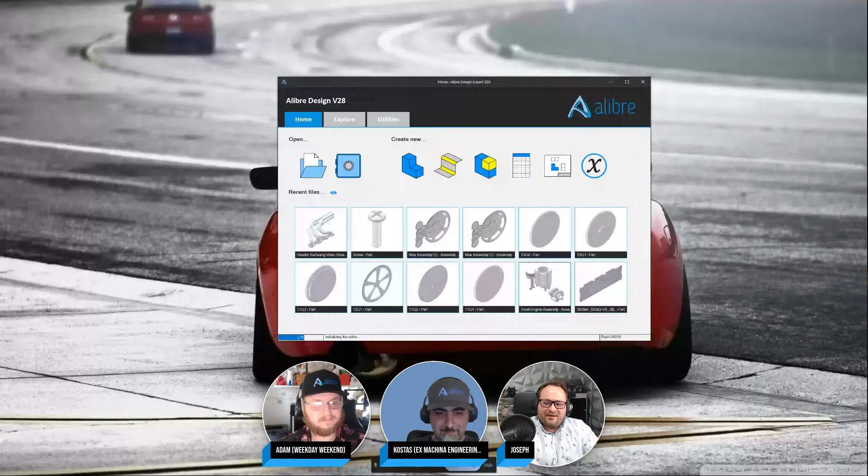So I'll pull up a model of a simple engine. With all my streaming on my machine, it's running a bit slower for the first startup here.

Well, anybody heard any good jokes lately? The one I told in the last stream wasn't quite as funny as I'd hoped. I don't know if it's family friendly, but I can give you a machinist joke: a machinist walks by a hole and he says, 'I tap that.'

I have jokes, but that's fine. The ones I have are not... yeah, inappropriate. So they're not borderline brand-appropriate, we'll say.

Well, while this loads here, I think I want to ask the chat. I saw Sweden, which is an interesting spot. Anyone else from anywhere cool? I'm here from Crete, Greece. So there you go. I take that for granted. As well, you should—Crete is awesome.

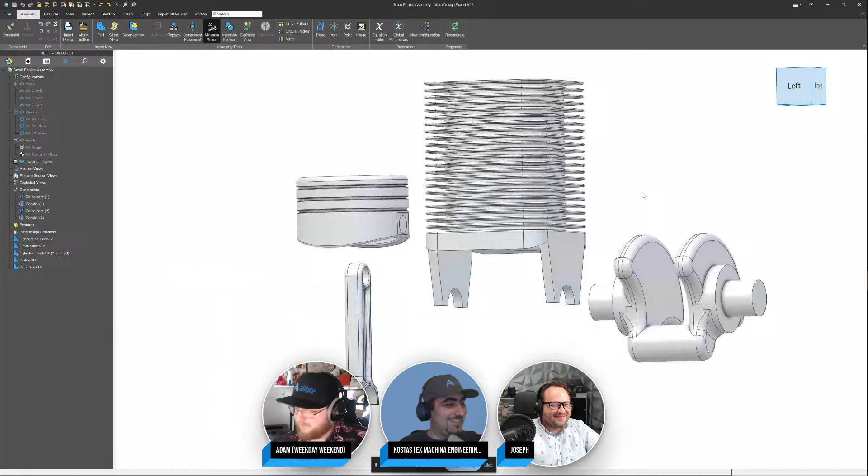Okay, I finally got this up here. So enough stalling on my end, right? If I start building constraints on this—and of course I just go click the wrong edge. So if I start adding some constraints where I click some simple things and I go to position something, there we go.

Let's pretend that when I move this crankshaft in place, I've got some conflicting surfaces. One thing I can do is when I select a surface, and if this is blocking me from selecting this surface—I know it's not, but we're pretending it is—I can right click and hide, and that stays selected so I can still apply that constraint. Then when I'm done, I can simply unhide and get that constraint. So that's kind of my go-to way of getting around when something's in the way. Hopefully that's helpful, let me know in the chat. I don't know if you guys have any other approaches as well.

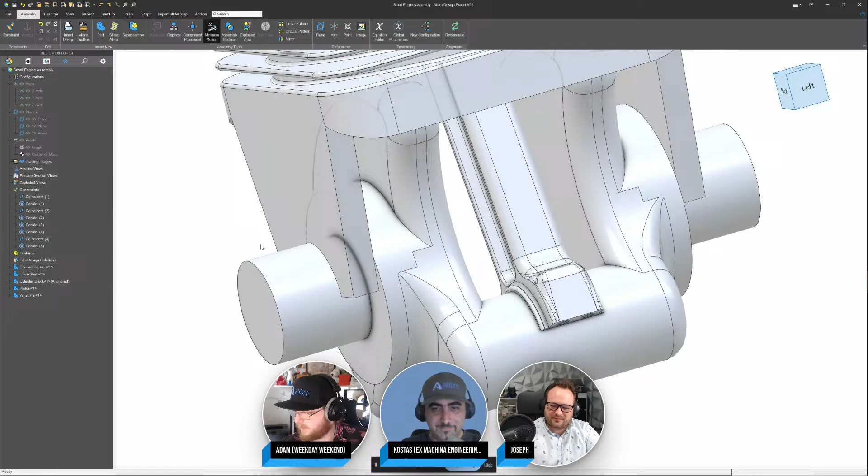No, I think that might cover it. Let us know if that helps you, if that answers your question. Yeah, because this is such a common, ubiquitous thing, right? Sometimes things just get in the way of other things in an assembly.

Can I also say the trick I use to select behind? Just change the view to shaded with hidden edges. That also works in assemblies, but if it's very complicated, it makes the assembly a bit hard to see. But if you've got an assembly with a few large parts and you just want to select an edge for a fillet or whatever, you can change the view to shaded and all edges, that's the terminology. You can even use that to select through in assemblies. That's a cool trick.

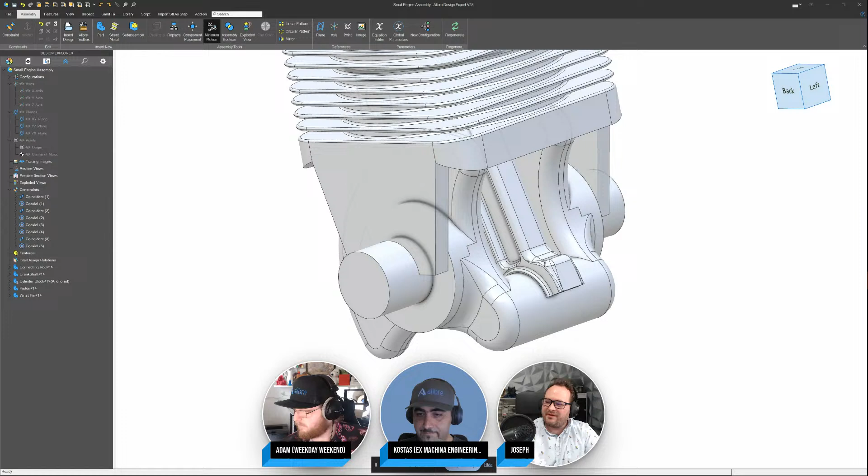That's awesome. I just noticed we've got Michael Berglund, 25 years with Alibre. Yep, that is amazing. Really cool to have a partner with us on here. Maybe you can help us answer some questions too. Thanks for joining, Michael.

Let's see, we got Switzerland, Minnesota, North Carolina. Sweet. All right, any other questions or things that we can address?

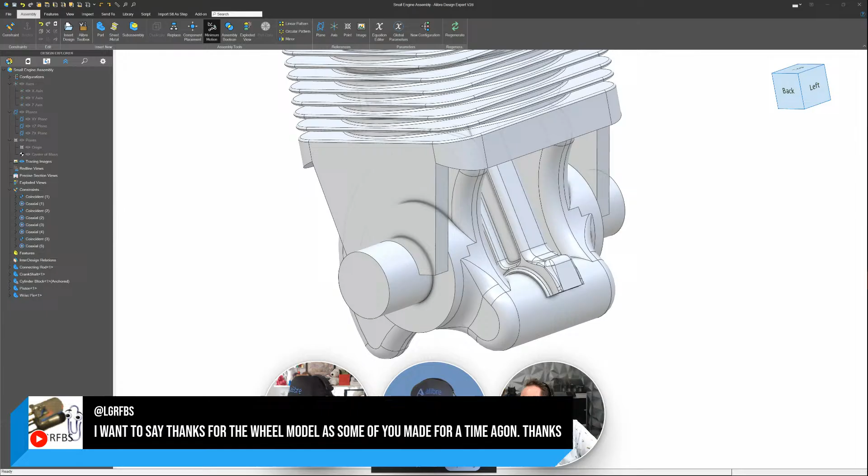Yes, if I can just hijack this. So that's a very interesting question. I'd love to answer that if you would allow me. The question is, what's the most efficient way to create a rectangle with equidistant side edges from a center point in a sketch?

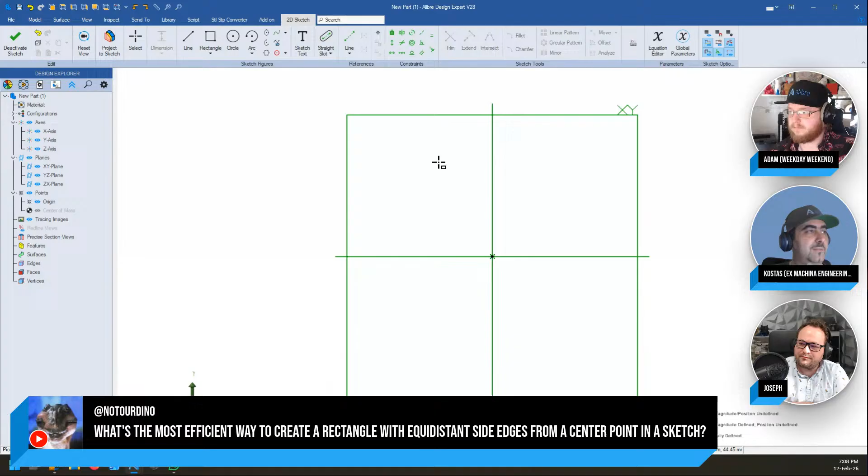Well, first of all, if you've got a sketch, you can definitely use the center rectangle, which will, by definition, do what you want. If the corners are equidistant and it's a rectangle, the sides are also equidistant. But there's another way, and it's a great little tip.

It's to use the midline constraint, that one up there. Instead of using it to define a point as being the midpoint of a line or an edge, you can actually use it with 3 points.

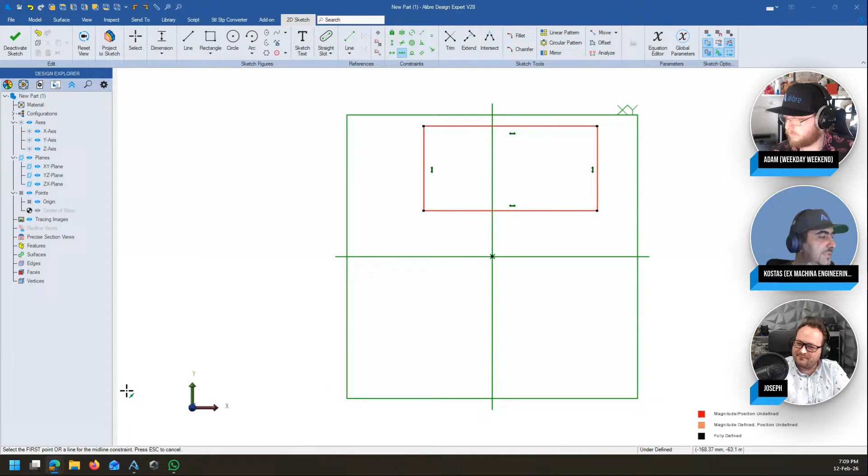The way it works is the first two you select, you can see a little prompt down here. Guys, when you're working, always take a look at the prompt on the bottom left corner. There's some great useful information there, whether you're dimensioning or using any tools in Alibre. It says select the first point or a line. If I select 2 points, now I've defined a linear segment.

Then if I click on a third point, Alibre internally calculates the perpendicular bisector to that linear segment and makes sure that the point I selected is on there. So now I can move these points and they stay symmetrical to that point.

Now, if I also do that for these side points... sorry, I hadn't selected it. Okay, let's go again. What I have now is the center rectangle, with sides that are equidistant from that middle point.

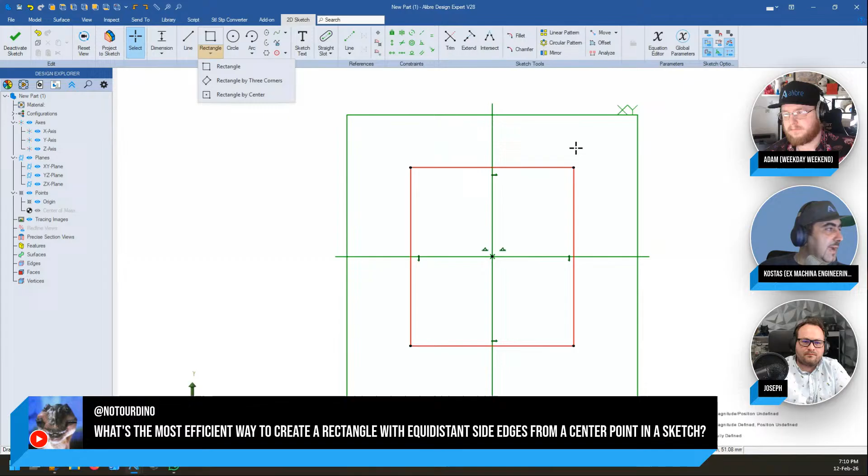So Alibre Atom, for example, which is the budget option of Alibre, less than $300, does not have rectangle by center, but that's how you recreate it in Alibre Atom. You do a normal rectangle, then apply the midpoint constraint, and again the midpoint constraint. There you go, center rectangle.

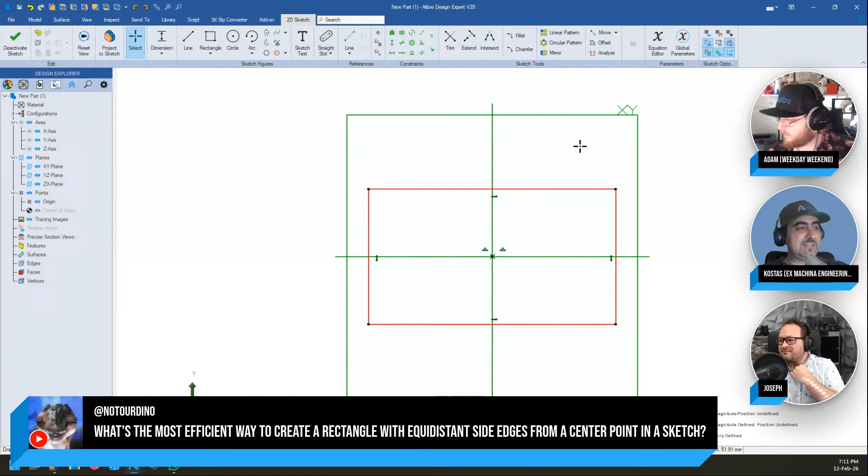I hope that helped, that's a really nice trick. That is a good one. Symmetric works, but I'm really liking the midpoint approach. It's got more potential because it depends on 2 points, so it doesn't even need to be symmetric with an existing line. It's just a single point in the middle of 2 other points. It's more versatile, is what it is.

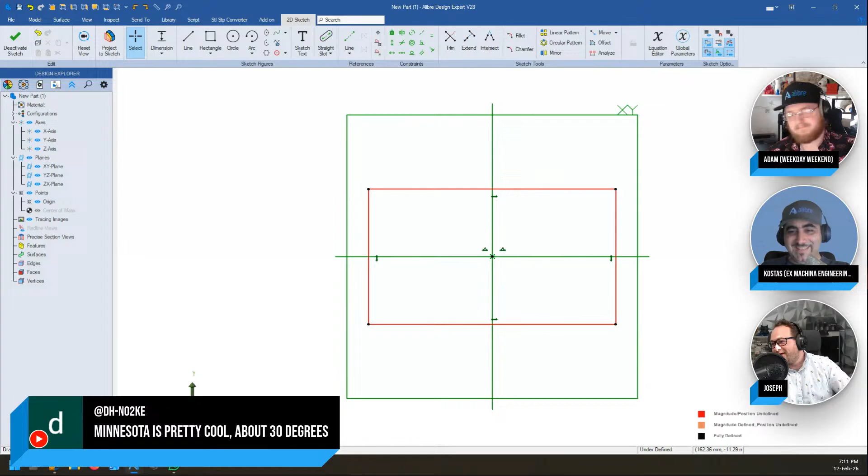I've got someone here from Minnesota. I have to say, I've got family in Minnesota. They have a house in Minnesota and another house in Florida. They like extreme temperature changes. When my cousin was very young and they were moving to Minneapolis, he said, well, we're moving to a place with very small things. They have mini apples and mini sodas. So I just had to share that. Is that, by the way, the same machinist we were talking about earlier? No, okay, never mind.

I like this one. When should you use anchor part and when should you not use it? Do you want to take that, Joseph, Adam, or should I? You can grab it, however Joseph can. Yeah, we're on your screen. Let's do it.

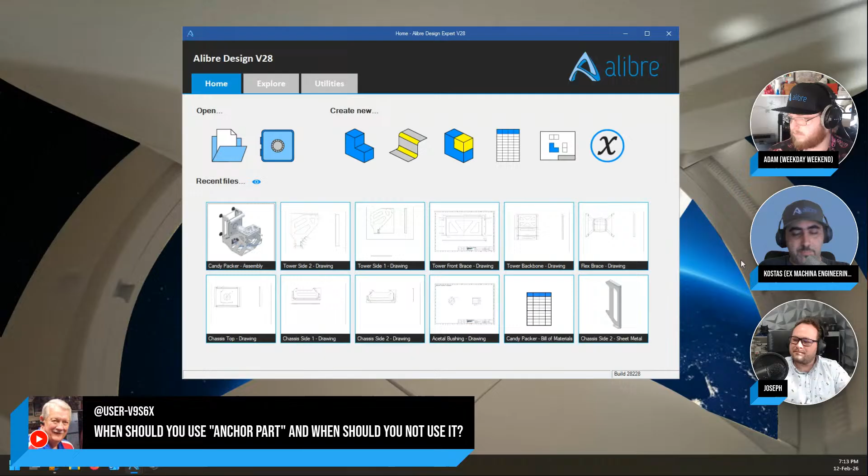Okay, so when should you use anchor part and when should you not use it. The idea is this. I've got a token assembly here. Again, don't tell anybody you saw this, right? This is between me and you guys, live stream exclusive. So don't tell anybody you saw this assembly. But the idea is that when you have a part that you know is going to be stationary, and it's one of the initial parts of your assembly, and it's a very basic part, then it's a good idea, and generally speaking, you can use anchor part on it.

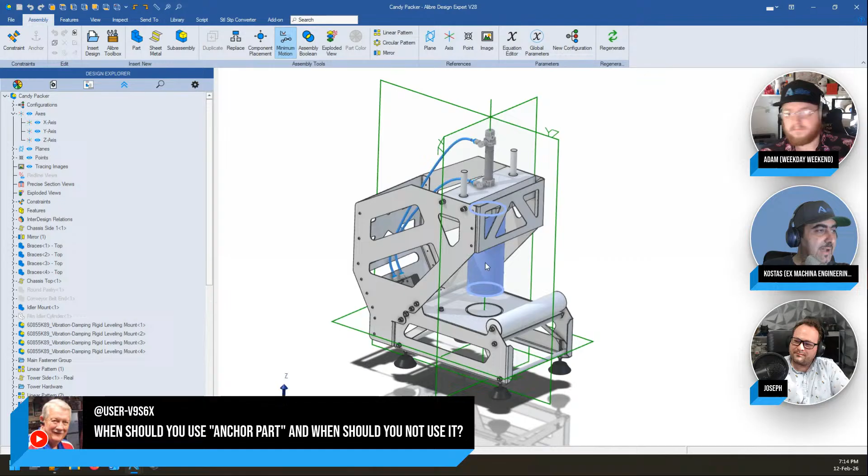On the other hand, you should know that anchor part, and that's basically what I want to bring your attention to, is evaluated alongside the assembly constraints. So if you've got an assembly that has some motion in it, and you need to check that motion and account for it, maybe even get some measurements off of it, it does pay to constrain your parts, because that will create fewer constraint collisions, restrictions, and errors down the line.

So my working advice, what I've found working with Alibre, is if it's one of your very first parts and you're completely sure that it's never going to move and never going to have any kinematic properties, yeah, you should use anchor part on it. But if you can take the time and constrain it properly, it's slightly better. So I hope that helps. And if you guys have some more input, please go ahead.

Only thing I can think of is that depending on what you're doing, it might even just be better to take the extra 2 seconds and constrain it by aligning all the same planes. It might also be just a little bit more robust. Yep, certainly. If you have to rotate your part, then you can change which planes are aligned with which, so you can get a nice rotation that way.

If you don't mind, I'll jump to my screen real quick. Just on that note, we'll go to Insert Design, and I'm just going to insert a random part here. Now, if I hover over my origin, you can see that little red dot symbol there. That means that all the planes are going to be aligned, and that is a quick and easy way to make sure that you have the same geometry as when you modeled the part.

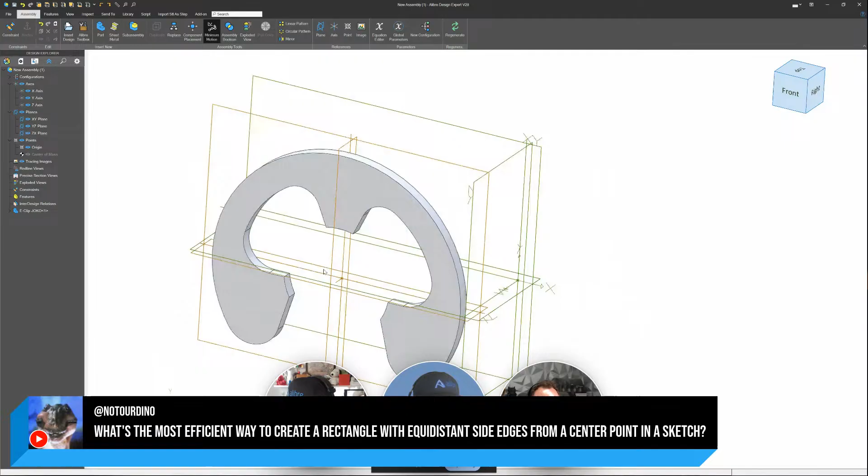So if I right click and show reference geometry, these orange planes are the planes that I used to model the part, and we're lined right up on that origin, just the same way the part was modeled. So if you need to do mirrors in the future off of your initial part, that's a great way to make sure your planes are aligned around the origin to do mirrors properly. And then if we just anchor the part, we know it's anchored around those planes. But as we said, it's a lot more preferable to align it other ways, because it opens the door to simply change things if you need to. Hopefully that was a helpful addition.

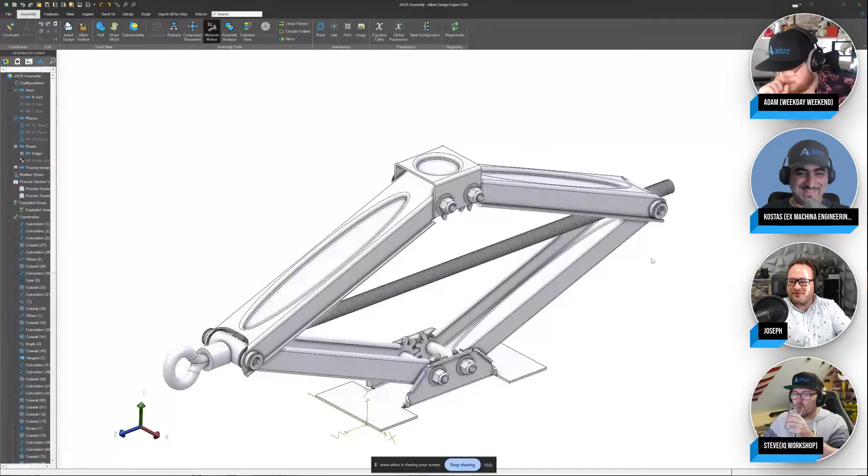This is a pretty interesting one. I designed a turnbuckle and constrained it in an assembly. It will turn, but it won't thread. What am I doing wrong? And the answer, I think, is possibly nothing. I can take this on my screen here. So here I've got a lifting jack, and as I twist, it lowers and raises, and that is due to a mate that we would have, like a mechanical mate or a screw mate. So it twists as I move things. This is available in Expert, I'm pretty sure, not in Professional, so if you don't see that mate, that could be the issue.

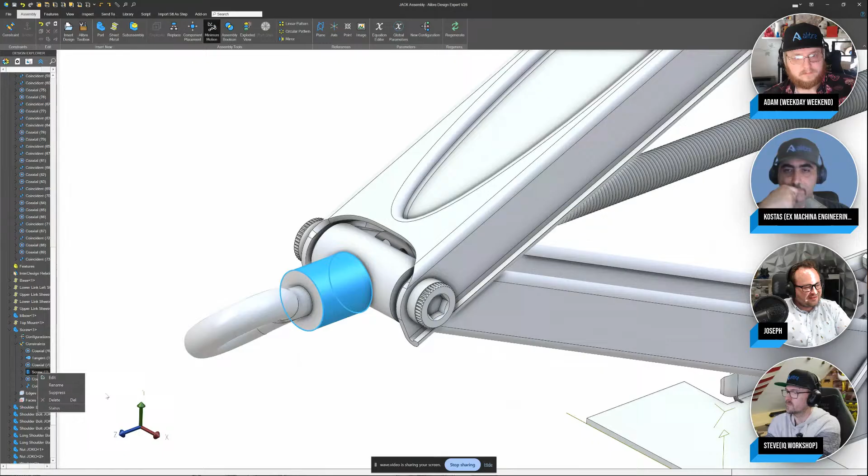Let's see if I can hurry and replicate this mate here. I'll show in Explorer and go to my constraints. So here's a screw mate that I'll suppress. And by the way, if you ever need things to thread properly, if you're very particular, you can suppress the mate, and then adjust it to where it's going to fit properly, the right amount of turn and everything. Then you can unsuppress it and it'll be right on track.

I do that with gears a lot. If my gear teeth aren't aligned right, doesn't make a bit of difference, but it's much nicer to look at. So I would leave that sort of stuff in so that the gears didn't mesh properly, just to trigger people on purpose. There's some fun with that too.

I do that as well, Joseph. And I thought, Kostas, I think you're muted. No, I can hear Kostas. Oh, I can't hear. Well, I am. Really, no, I can't hear Kostas either. Well, let's make sure you have director's voice on here. Anyway, so I just wanted to say, if you can hear me or not, that I also do that. I don't know, you in the chat, can you folks hear Kostas? Let us know, can anybody hear me? Am I a voice? You might have to refresh your browser. I've had that happen before. Let me do that right now. Let me refresh mine right quick.

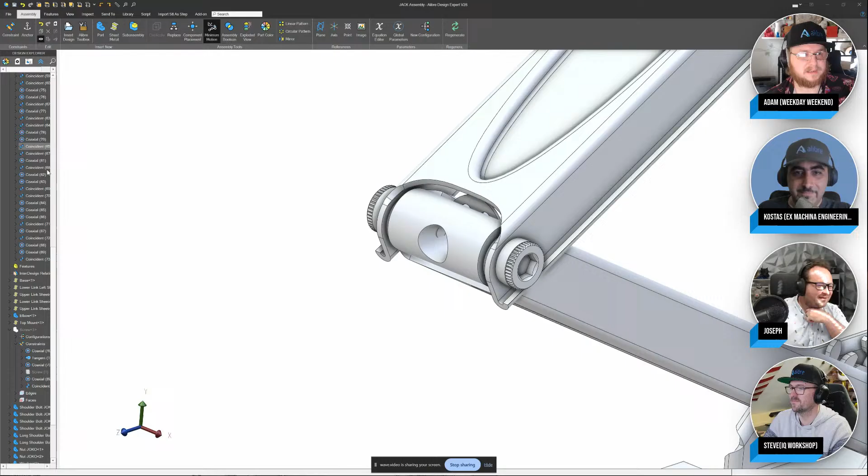There we go, go back to director's voice here. And then there was 2. There was 3. Can you hear me now, guys? Yeah, I could hear you all along. Okay, and now we've got 5 bubbles. Greece is not that far from that way, I might have been able to hear you if I'd done that. That's the thing, right? You know, England can hear me because it's closer. So maybe I should start yelling, what do you think? Maybe a big megaphone. Definitely do it. Yeah, stranger things have happened.

Audio. So to apply a screw mate, we'll go to add a constraint. I click on the mechanical tab right there, which is available in some versions and not others. And we choose the 2 geometries, and I actually think I need to choose an edge here. I have not done a screw mate in so long. So this is good because we're all getting refreshers too. Yeah, I need a refresher here because my screw's grayed out.

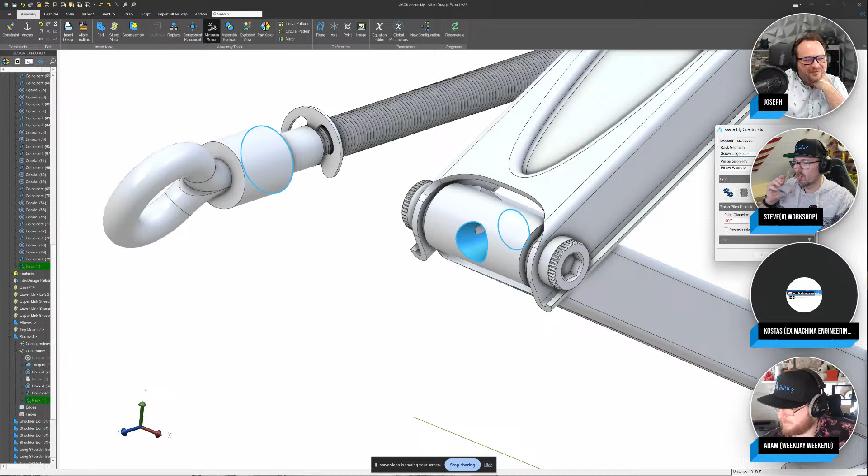All right, what am I doing? I'm glad I'm not the only one that has to refer back to one of my own videos to figure out how I did something. Oh my gosh, yes, I do that with my own videos all the time.

There is a fantastic Basics of Assemblies video on the official Alibre channel, by the way. Apparently watch my videos, not me live - that's way better. Well, I think we can safely say that Joseph has forgotten more things about Alibre than we will ever learn, and it's official. So I guess so, there you go.

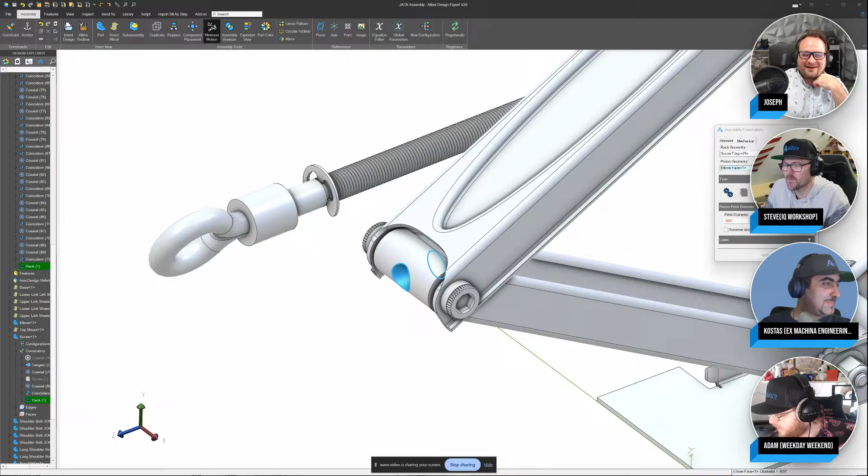You've done a lot with importing and exporting. This guy's asking about SVG or DXF importing - having trouble of course with exporting a file that imports easily.

So yeah, sure, let me find the file that I used for my latest video. It says exporting from Illustrator, but if there's a better program or format that easily imports, you'd appreciate it. Okay, let me see. So I haven't been using Illustrator.

I've never used Illustrator. What I use is Inkscape, right? It's a sort of open source alternative for it. It also works in Linux. It's amazingly powerful - the more I use it, the more stuff I find out about it. It's a great piece of software, right? And I've got it up on screen now.

And so in my last video, I did my homework, which you guys have yet to grade, actually, right? You should grade it, I'm still waiting for the grade report on my homework. So for that homework, I needed to get some female hair on a dummy, right? Don't ask why, go and watch the previous live stream, too long a story. Steve's laughing - don't laugh, man, this is serious stuff. It's homework, homework's serious stuff. It can be fun. Yeah, it can be fun, sure.

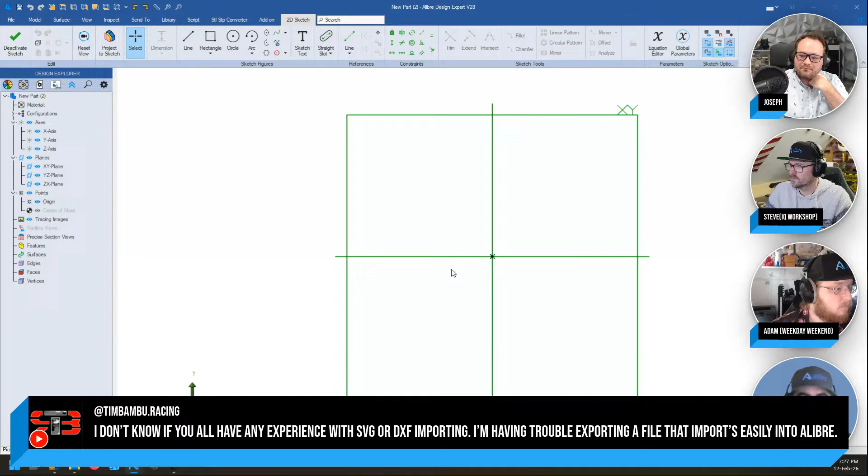And I get this menu. Let's click OK for now. It takes a while because it's a bit of a file - that particular one had too many corners, but it will eventually come in, and it will come in as a sketch. And it's worth noting that... oh come on, where is it?

Highlight it in your view. There you go. No, it's sketch is turned off, and I accidentally closed the sketch.

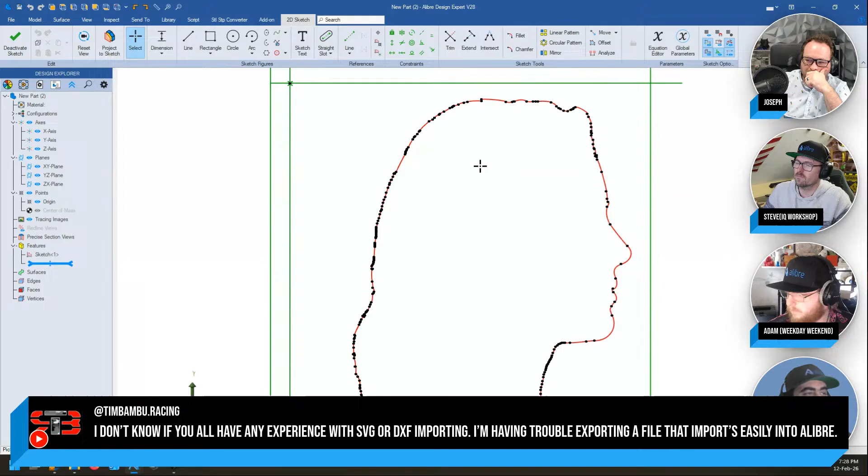What you should know here is it comes in as a completely undimensioned and unconstrained sketch. So this is not fully defined in any way. But if you did the work correctly, and there's a single line in there with nothing overlapping, and you don't have double geometry and all that, you should be able to extrude it straight off of the sketch.

That is, I think it's SVG. Go on, Kostas, keep going.

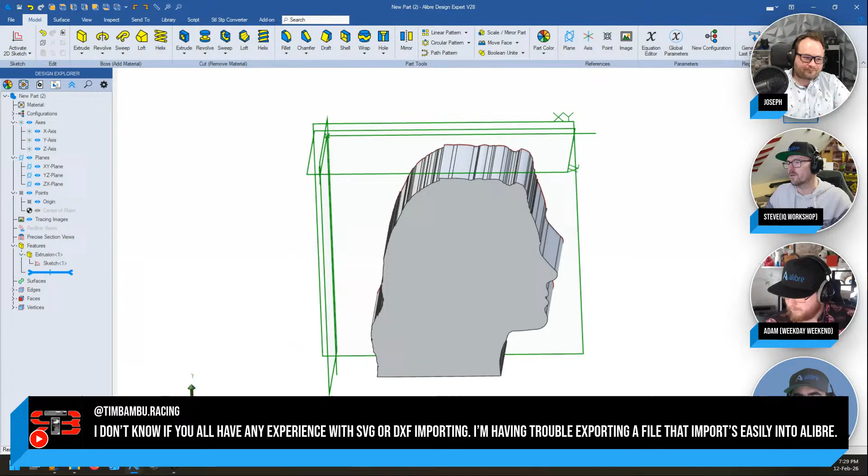I just want to say that this is the workflow to get an SVG into 3D. I was just going to compliment what you were saying in that various different applications deal with vector files. Even though an SVG has a particular standard, a DXF has a particular standard, every application, whether it's Adobe, Corel, or Inkscape, handles vectors and points very differently. And Inkscape, as you pointed out, I have found to be very reliable.

As an intermediary sort of application, if you're having trouble with a file, it'll load it up, and if you resave it as DXF or SVG, you very often find the resulting format that Inkscape outputs is more universally accepted.

That's true. I'm using a laser cutter with a very old piece of software, I think it's LaserCut 3.3, and the software looks like it's out of 1995. But if I try to export anything from Illustrator or similar, it hardly ever comes into that software with any degree of accuracy, and there are spurious lines and all sorts of noise.

I just load that into Inkscape, save it as a very early DXF format, like pre-2000, pre-R12 I think it is, and it just loads up into the software fine. So Inkscape is really good as a translating application in the middle. It has actually gotten me out of a tight spot on more than one occasion.

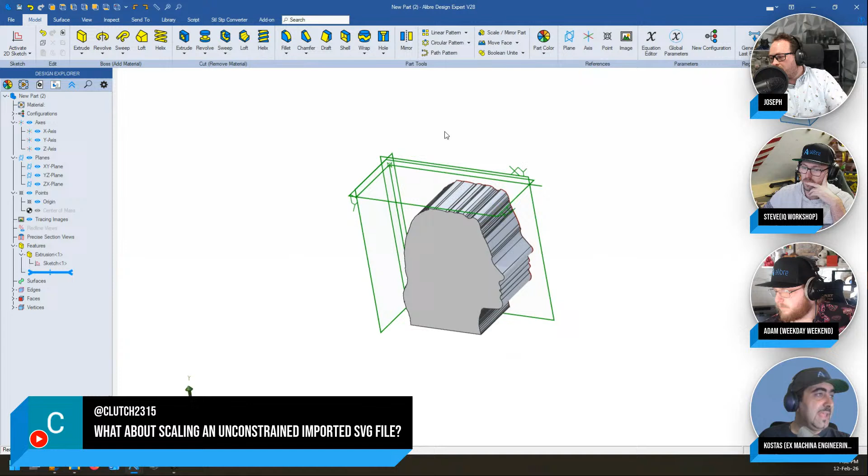What you can and should do with DXFs, and actually this particular file—if you watch my latest video, I do that, I've got that in fast forward, but you can see the workflow—this is too small, I couldn't use this because this was too small. So what you do is you get a 3D shape out of it, and then you scale that, and you do that through here, this is the menu.

So let's do a, I don't know, scale factor 3, for example. Okay, uniform scale. Now...

If you don't need that 3D file, you just want a sketch to do something else, and you definitely don't want this 3D shape in there, you can go into Surface, which is available, I think, only in Professional and Expert—if I'm wrong, correct me there.

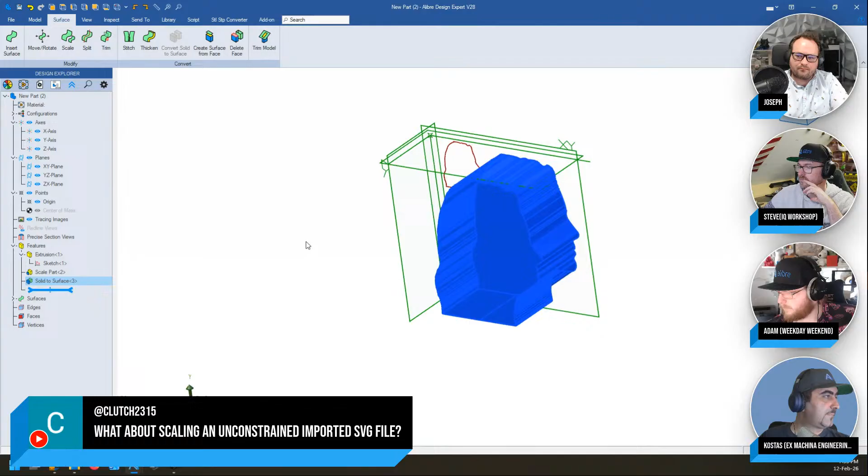And you can convert solid to surface, and then you can delete this surface... no wait, oh man, I tried to be speedy and it failed. Maybe delete all of the faces? There's quite a few of them in there. Delete face, maybe that'll work. Yeah, that'll take 15 minutes. Oh come on, go already.

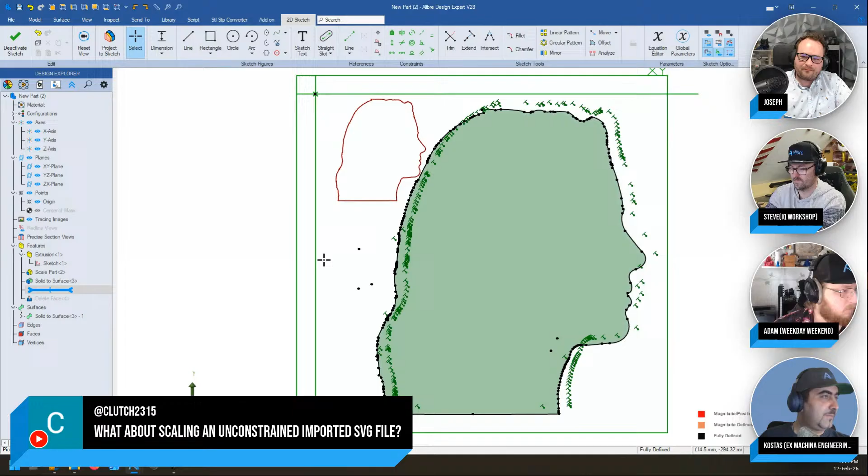So now, and this is parametric, I can go back because I forgot to do what I wanted to do. So now I can start a sketch, and I can project the scaled surface—and that is going to take a while because there are thousands upon thousands of little points in that one. There you go. I exit out of the sketch, and now I will go and delete face.

So now I've got the scaled sketch, and I don't have any other 3D geometry messing up my design anywhere else. But that's the way you should do it. You should not be trying to scale the SVG or the sketch right off the bat. If you've got a super simple import, which probably doesn't apply to anything, but if it's a circle or a square, you could probably go into the sketch and do offset entities to save some time. But you'll get distortion as your shape grows even moderately complex. So that's a very limited scale where that would work, but this is a great solution.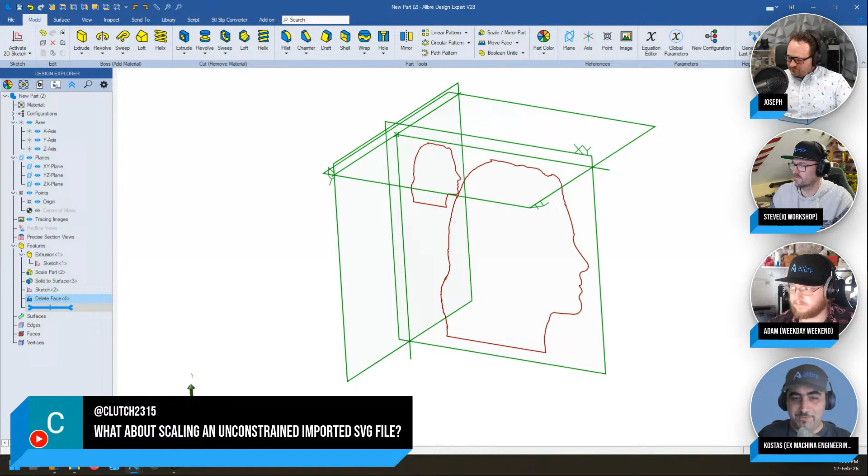Let's see, I've got one possibly for... there you go, Adam to the rescue. I've got a really quick one for Joseph here: where can I see more of that Steam loco design that shows up in the intro?

Oh, that's a good question. That was part of our Alibre design contest, and I don't know if we have the rights to distribute that, but it's a really cool one. You can probably see at least some more information about it on the Alibre website though. Yeah, and you can also find a ton of pictures of that model and detail in the gallery section of the forum. So, and it's got some great renders, some great pictures. It's an amazing model, by the way.

I'm not sure who made it. I think I know, but I'm not going to mention it because I don't want to get it wrong. But this thing is designed down to the very nuts and bolts, right? It's an amazing model. And the fact that it's on the forum means that if you wanted to ask questions about it, you very well could, and the guy who made it is very active in the forum.

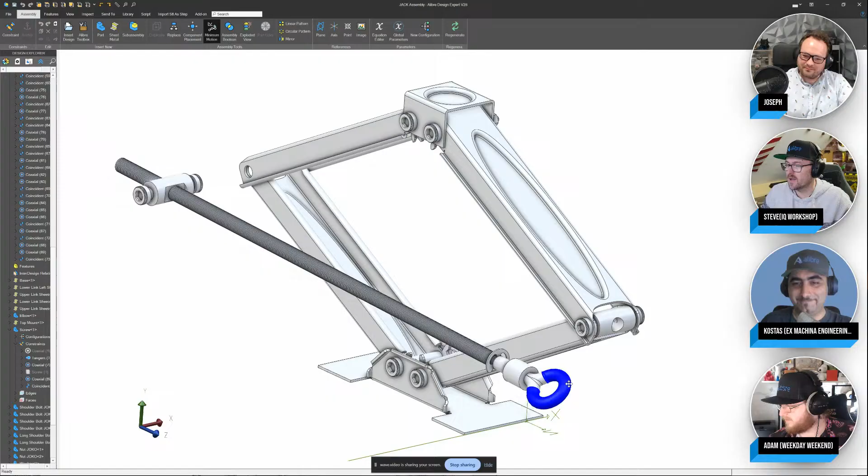So there you go. And I figured this out, guys: the faces that I was clicking were going to be a potential over constraint on the assembly. So that was all that was. So, yep, we click a face, we click another round face, and then our threads are selected and we can establish a pitch. So just a real minor thing.

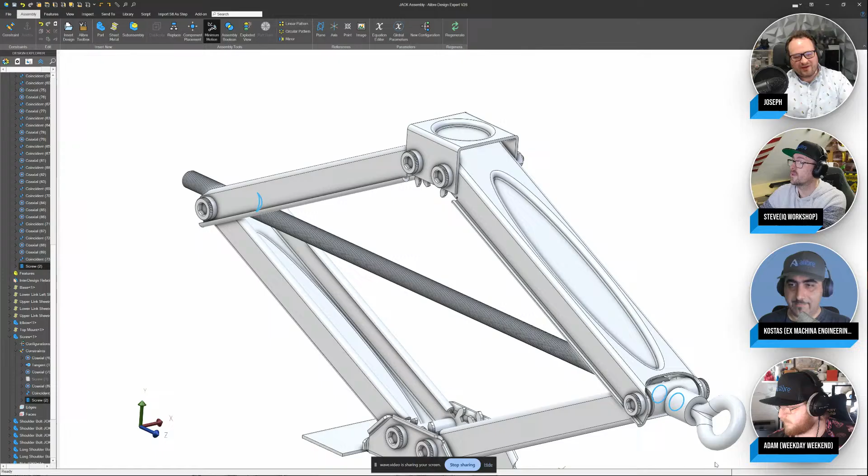And I put a really, really coarse pitch in there so that it would be obvious. I'll go ahead and close my dialog and unsuppress that mate. So now when I turn it, there's a lot of movement because I just made a screw mate with a different pitch. So that's how you would do it for a turnbuckle. Let me know in the comments if that helps, and sorry for the delay on getting to that question.

Adam, yes, can we grab the question at 5:26 for me? It was literally the one before you selected about the loco, the Steam loco design. I'm not sure whether or not that one would get into the forum.

This one: yeah, so if you glued a metal rod into a 3D printed PLA part and later you realized you need to remove it, how are you going to do that? So it all depends upon what adhesive you have used on this part. If you have used CA glue or super glue, one thing you can do is use acetone. Soak it with acetone, and that will dissolve the CA glue and allow you to remove that.

Just be careful using acetone around your 3D prints, depending on the material. It's okay in this case because it's PLA, but if you're printing anything in ABS or anything like that, you need to keep acetone well away from your prints because it will melt it. Also use a well-ventilated area. 100%, acetone is flammable, so you need to keep that in mind. All your hazardous material - read the label, right? This is definitely not safety advice.

A lot of hot glue or super glue can also be removed with isopropyl alcohol as well, depending on what you got on hand. So I just thought it'd be good to cherry pick that one out. I'm not sure if that would be relevant in the forum or not. So, cool, this is a really quick one.

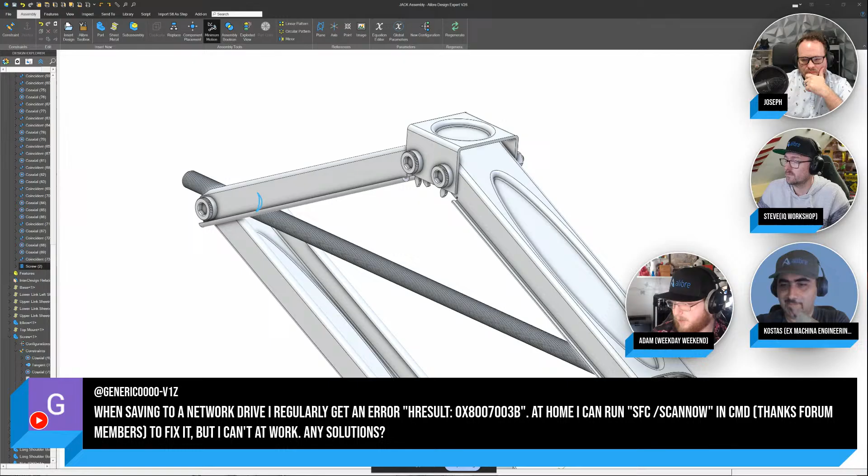You might also talk with your IT guys and ask if they can take a look at your OS, maybe run that for you. Maybe if you tell them your PC's running a little shaky, maybe they'll be willing to run that for you.

Absolutely. I'm going to see if I can get that locomotive on my screen here, just so we could view it at least.

And while you do that, can I just answer this question here by Silvio Z? Can Alibre handle mesh, just show mesh in the background to help for design or what? It doesn't quite work exactly like that. But we have covered STL import quite a bit in previous live streams.

And you can find a ton of resources in the forum. Basically, what you do is you can import the STL. There are applications, and there's a great plugin by Bolsover, David. Bolsover is his forum name, his forum handle. And he's made an absolutely epic add-on, which first converts the STL into a step file and then imports it into Alibre. And then what you have is a solid that is based on that STL. Now, of course, if you have any round surfaces or edges or whatnot, STL will lose a bit of information there. It will interpolate it with straight lines.

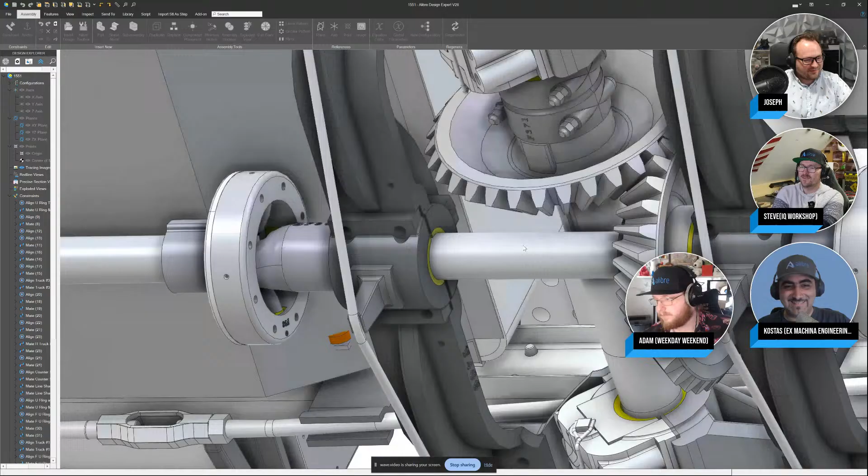There's all my screen rotations catching up to me. Still in process of opening this part. There's so much going on here, which is pretty common in any platform of this scale, but the detail is so amazing here. That's twice in one stream this model has impressed me now.

So yeah, that's a good point. We'll check the showcase and see if we can add this in, because what an interesting part. It's just so realistic, it's amazing. And I cannot begin to imagine the time it took to do all of that. Because it's not like, oh, I'll get the shape right and that's it - they actually designed it. Pretty cool. It's so realistic that it's one of those things where you look at it and think, oh, they made it look easy, but it's so not easy.

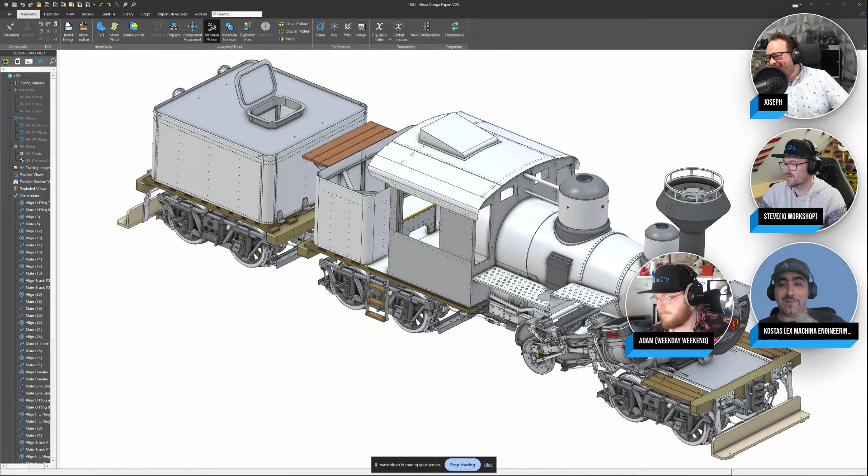But here's a pet peeve of mine with CAD - I know you all want to hear about it. I see someone saying, I'll make this video, I designed a Formula One car in SolidWorks. No, mate, you didn't. A Formula One car is like 85,000 different components. You did not design it in SolidWorks. You just made something with the general shape of it. But let's be honest, you didn't. And this model is the exact opposite of that.

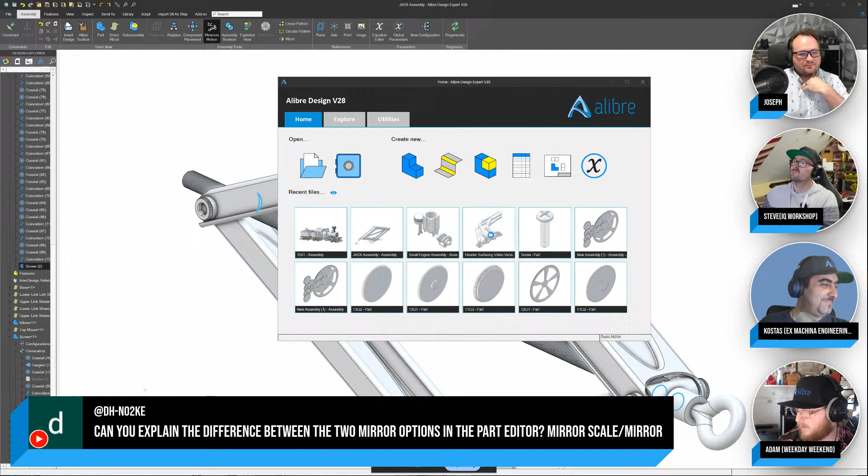There are two different mirror options, one of them being just mirror and the other being a scale mirror, and it's right in the name - the scale mirror is designed to scale. So I think he briefly touched on that, but cool.

I'm still recovering from that big train file, but that's something that might be good to demonstrate too. In the meantime, I've got Relief Maker. What is Relief Maker? This is something we have, but it's not part of Alibre - it's a completely separate product. Someone in the forums, Stepa Libre, who is really, really smart, says that we're killing it with the live streams, but what about Relief Maker? So I wanted to address that here.

Bas reliefs are those things you have, like ancient sculptures, where sometimes they'll have an image that just kind of sticks out of a plane but isn't a full 3D model. When do we use bas reliefs? We'd use it for things like woodworking - a friend of mine I used to work with in medical had a CNC machine and would make artistic bas reliefs like this and sell them, really, he made a lot of money. In woodworking we may want to add a lot of detail and make products with images that stick out of a plane. Another use is coin making - think about all the faces and things on coins, bas reliefs are really important for that. Modeling that in any CAD could be really challenging, but it becomes really simple with dedicated software that makes these kinds of reliefs. Jewelry is another one, if you need to make rings or necklaces. And in general, art and sculptures play a big role too.

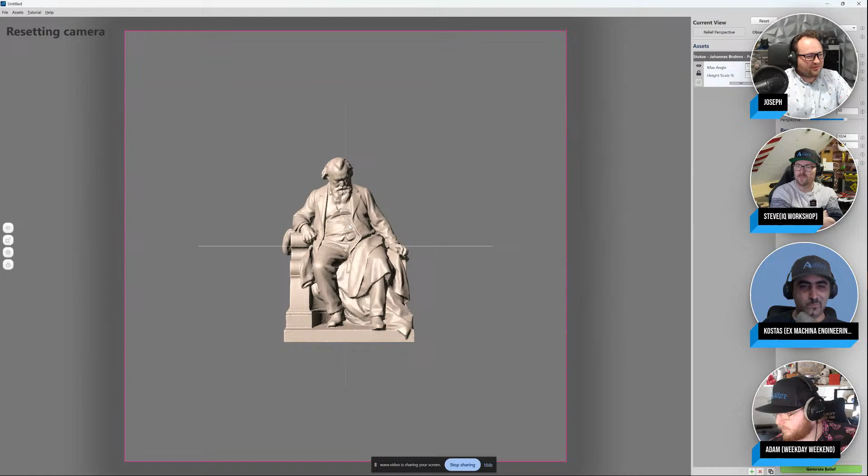So we're going to add an asset from a file, and I think I'm going to go with this Brahms guy. I don't know exactly who he is, but he looks very statue-worthy. So we have this STL or OBJ mesh file, and when I create a bas relief, I simply click on Generate Relief. I've got it at an angle that I like, and it makes a bas relief of this guy, easy as that.

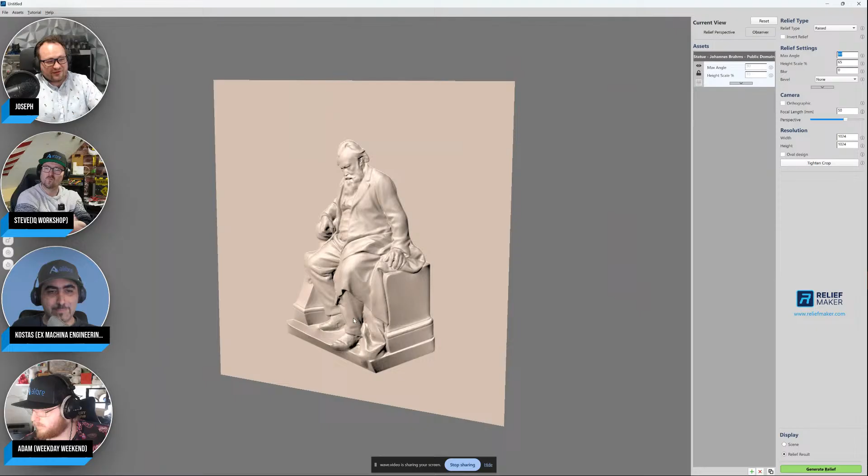Now we have some fine tuning that we can do. We can say, right now our maximum angle between everything, but it's most obvious coming out of this plane, is 80 degrees. So if I were to CNC this, it's pretty much guaranteed to work because there are no overhangs, and I can control the angles between everything, so I can use the tooling that I want and know that it will work.

Likewise with 3D printing, if I change my angle to 45 and I need to print this in the vertical orientation, we can regenerate this relief at 45 degrees, and we can see that there are no overhangs that exceed 45 degrees. We can print this in the vertical with no supports.

So we can fine tune with our different angle options, but we also can scale our height. So if I say something like 10%, we want this to be a lot lower, and we look at this from the side, and I generate my relief, it gets a lot lower. So this is almost like coin territory here.

Let me pull up another example. If I open up a new file and I add a dragon, this dragon has certain details that I care about. Let's say that I care a lot about the scales, and I'd make a 30-degree max angle, and I scale this to something like 10, and I want this to be very flat.

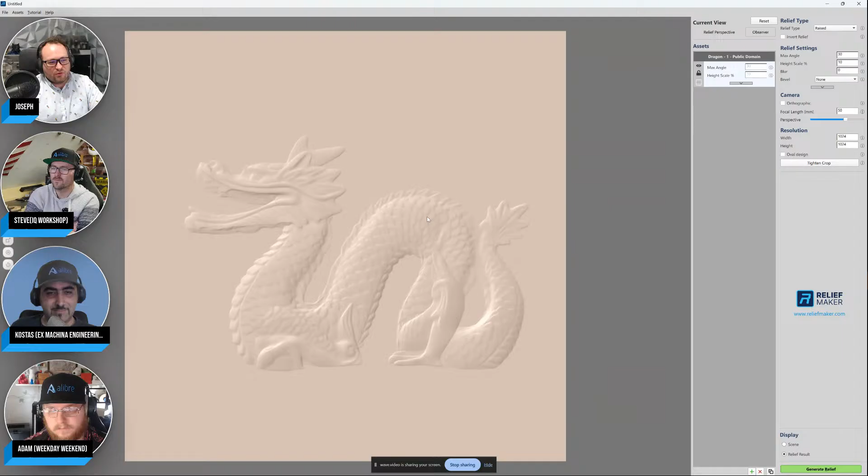And as I generate this relief, well, it's pretty good, but maybe I want more detail with the scales, or I want to emphasize certain things. If I go back to my view, I have a few tricks up my sleeve.

The first one is I can say I want to emphasize contours. When I emphasize contours, you can see that there are some pink lines around my model. This is what my graphics card has found to be sharp contours that will be emphasized. So if I look at this ear right here, and I generate a relief, there it is. We can see that that ear is highlighted with a sharp contour now.

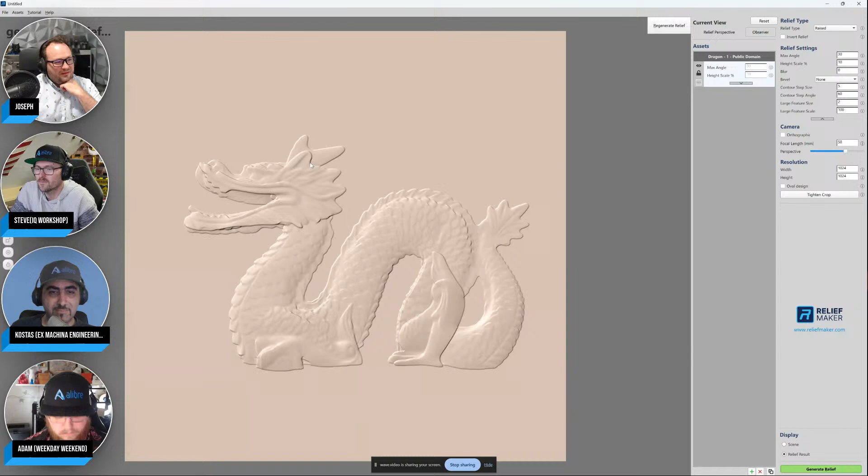You can see a lot of sharper lines, and I can exaggerate that. If I turn this up all the way to 5, you can see just how much we emphasize those angles. So we can customize our relief in that way. We can also change the angle that these contours apply if we would like.

But on to my favorite thing, it's not showing the scales very sharply. Let's say that I do want to have a really small offset like this, but I want the scales to show more. This is a really advanced kind of mind-bending feature, but if I draw a line from one corner here to the corner down there, then I can say, what would be a large feature? I'm going to say anything larger than 2% of the length from corner to corner, and so that would encompass all of the scales as small features, and then the big features like the head, the whole body, big stuff is large.

And so I can change what I specify as being large or small by changing the number in my large feature size. But let's say that my height scale should be something more like 30%, but everything large is going to be scaled at 20%. Well, then our scales are small, and so they'll be emphasized more, right? So when I generate my relief, I can make some custom alterations like this, and my scales show up a little bit more. Can you see that?

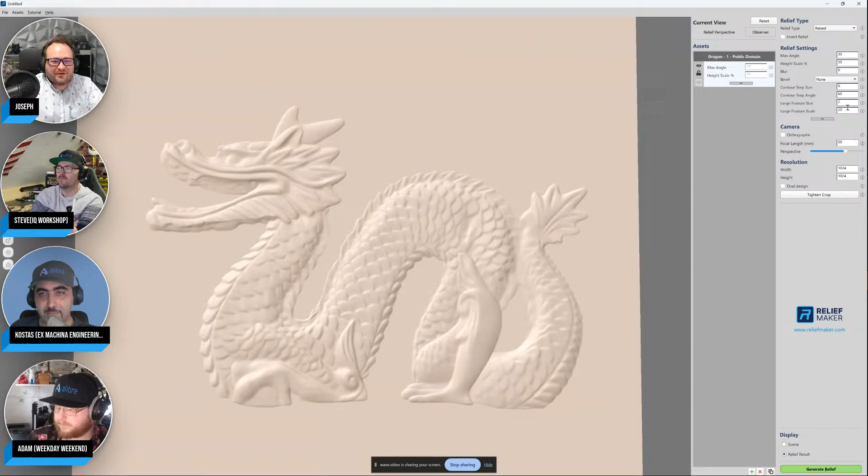Now we can monkey around with a lot of these settings to get some really fine-tuned bas reliefs in ways that you just won't find with any other software. Here, when I go to my height scale, if I give this a 60 and I generate my relief, we can see that the scales and things will show up even more. So I can play with settings like my contours and my small feature versus large feature scales, and things show up a lot more. I'll give this something really crazy just to overemphasize what's going on here.

So we scale this 300% for small things. You can see how much more it shows up. We can add a blur, and it actually makes the solid look blurry. I don't know how they accomplish this, but here comes a blurry dragon. Isn't that wild? Yeah, it's kind of anti-me because I love my sharp images, but it is cool when you want to apply a blur.

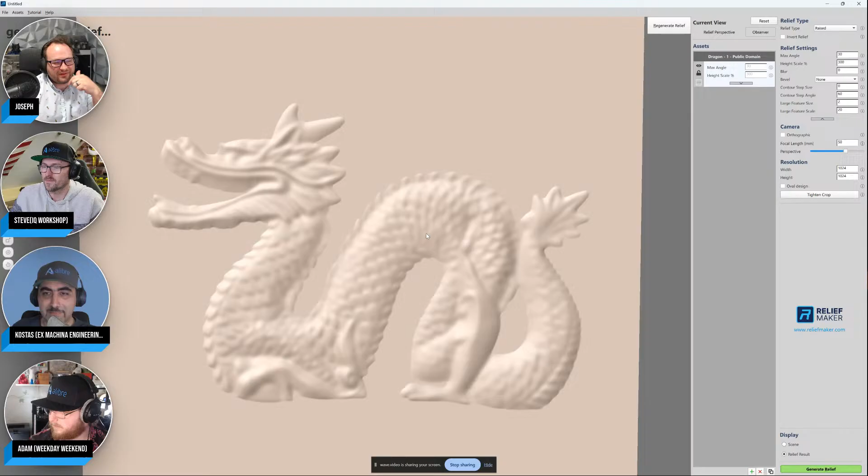We have a bevel effect. So let's make a baseline here - this is without a bevel effect. You can adjust the lighting with the right mouse button, but we can make a bevel where it kind of stands out of the plane. If I put a large bevel on there, we're going to see our dragon come out of the plane a lot more. Just like that, you can tell everything is beveled a little bit more. So lots of custom looks to get from just one single model.

We can also adjust our focal length on the camera. So this is a 21 millimeter focal length that I'm generating now. You can see there's a little bit of a change there because our camera changed focus.

You can change our output resolution. I do like my higher resolution, I'll go 4,000 by 4,000. And then, of course, we can crop it into an oval shape if we prefer that.

So these are things that we can export to a CNC machine, a 3D printer, something like that, and get really professional bas reliefs, whether you're making coins, jewelry, wood decorations, or even Han Solo - he kind of turned into a bas relief. So I think this is a fantastic example of a software that does basically one thing, but does it really, really well.

That's true - it doesn't have so many features that you're like, okay, how the heck do I use this thing. It looks like one of those softwares you can download, install, have a goal in mind, and get there with very little overhead of trying to learn what you're doing.

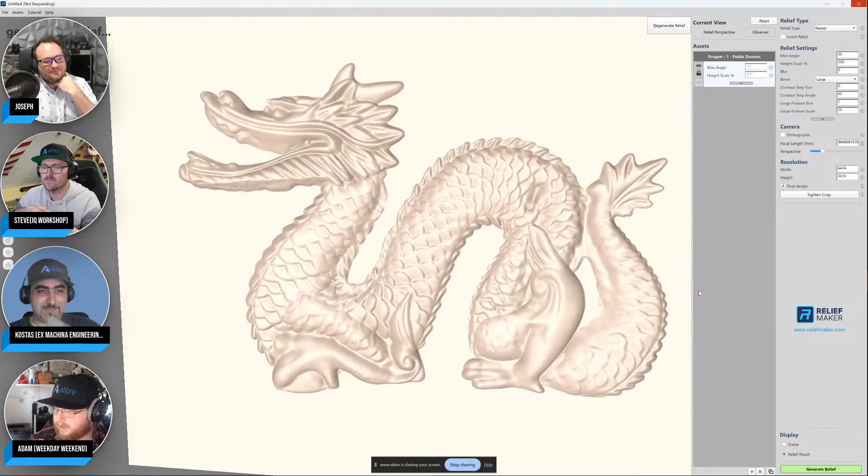Question: is the only source that you can import 3D models? I think it will take height maps as well, and that's also what it exports to. So great question, I should probably get into that as well. Yes, it's the only source for 3D models - it will take STL and OBJ, and I think that's primarily what you want to do. But you also can do certain height maps, and it will read a height map, so let's export this to a height map while we're at it.

I'm going to generate a non-oval bas relief here. Yeah, that's why it ate up all those resources, because you made it do an oval. And ovals are really heavy resolution, man. Let me speed this up.

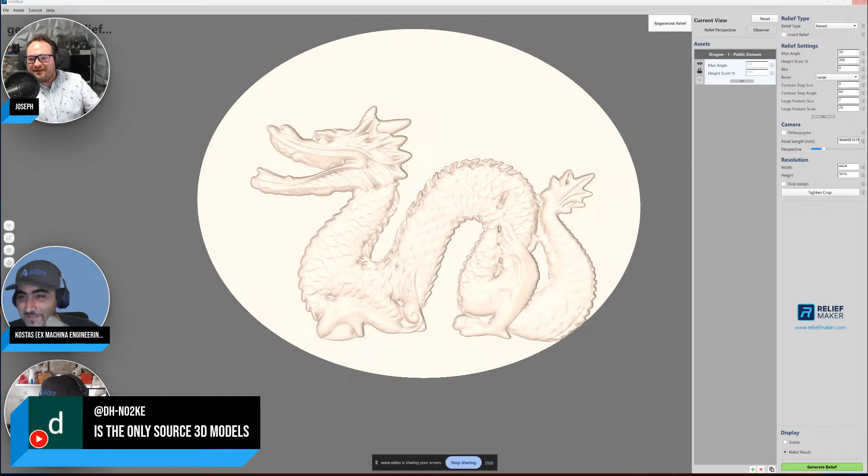The focal length is a few thousand kilometers - I may need to adjust that focal length, but this is what a height map looks like when we export it. So you export it as a PNG file, and where it is black is like 0, and the closer to white it becomes, the higher the height of it. So you can make a PNG actually start sticking out like a 3D model based on the color.

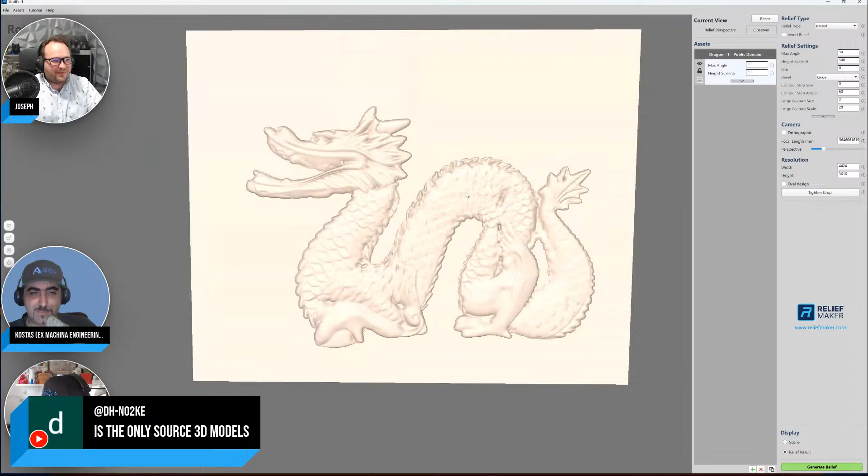So those are the inputs, and the outputs, of course, are you can create these height maps, and you also can export it as a mesh file, STL, OBJ, things like that. And then your machine can cut out that really cool bas relief you've made. Now we've covered that so far. Let me just re-import my dragon so I don't go through my settings again and clean everything up.

At default settings, I can create a bas relief as just a base model, but there are some other features as well, such as a recessed bas relief. So instead of raising it out of the plane, it can be recessed in. We'll take a look at that. It's a little bit more vague.

Let me up the height scale just a little bit, actually a lot, just to exaggerate what's going on here. And so there's a good recessed relief. There's a slightly different thing that can be done. We can invert a raised relief also to get something that's inward. You'll see it changes a little bit. So you can have multiple options for recessed and raised.

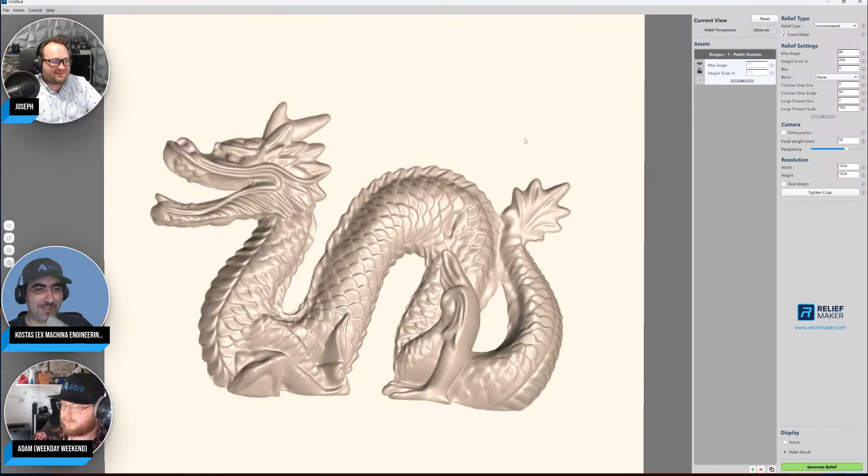One of my favorites is an unconstrained relief. That's great for a kid's toy. For Play-Doh, you make a custom form for it, or for cookies. You can make dragon cookies with this. Now I'm hungry again. I'm sorry, I'm just always hungry. What can I say?

This is not the best model to show off with it, but as you can tell, we're going into the plane and also out of the plane in both directions. I think 95% of what people are going to do are raised, but unconstrained is really cool as well.

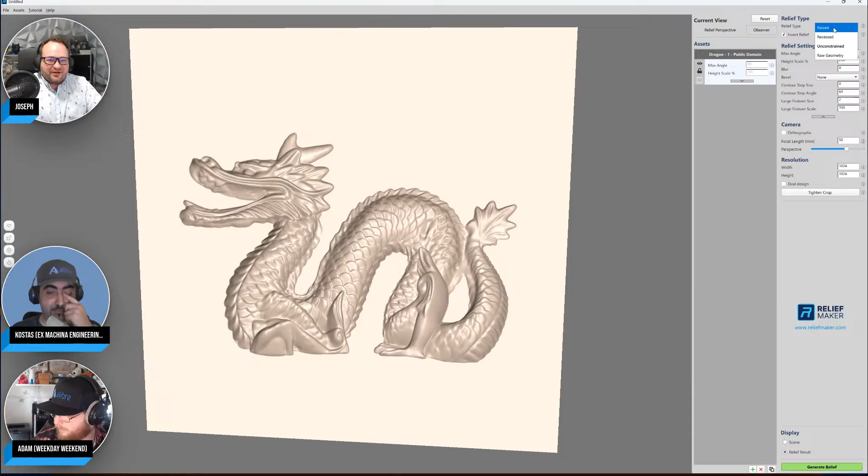And then raw geometry, another interesting one. It's not actually a bas relief. Let's not invert it so we can get a better look. Raw geometry pops out and is not quite what you would expect, but this is when you have something that is completely free of distortion. So if you need to do a bas relief on a coin and have the edges be completely undistorted and sharp, that is what you would use raw geometry for.

So a number of settings. You can do this with multiple models at the same time. If I go and add another asset from a file, let's go with this Johannes guy again. We can generate Johannes Brahms, the famous musician. We can actually generate multiple bas reliefs with multiple models at the same time. They can overlap, they can be brought under and in front of each other and things like that.

So the sky's the limit when it comes to making bas reliefs in Relief Maker. Hopefully that was a reasonable overview. I didn't catch the chat. We got a bunch of new chats. Anything interesting going on in there?

Are there tools to create a height map from a photo? That I'm not sure, I would imagine there is. I believe there are, yeah, not part of Relief Maker. It's not that easy, though.

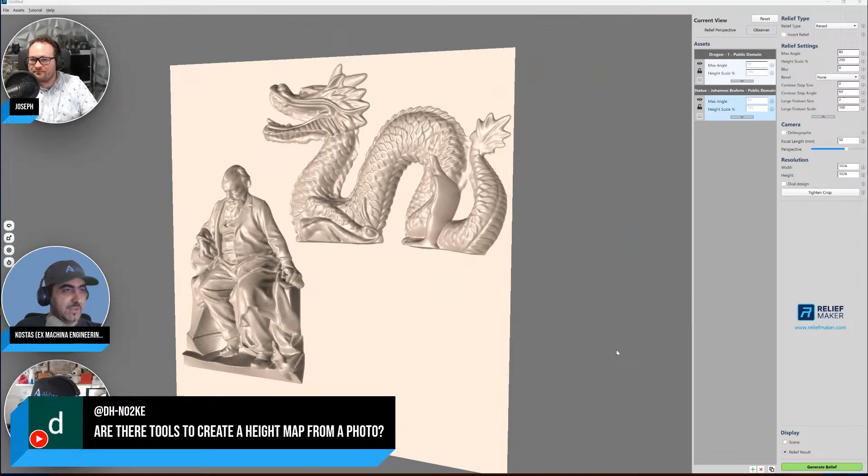I should tell you guys, having studied machine vision in my master's degree, photos have distortions based on perspective, and the lighting can really also add another distortion. The angle of the lighting creates shadows that go a certain way. So trying to get a height map off of a picture is not very easy.

There are tools out there, as Adam Joseph said, that will do a reasonable job, but they're not bulletproof. They need a good picture to start with, or else they're not very reliable.

I would say if you're just looking to do something like a lithophane, you could probably put it through Photoshop or GIMP or something like that, or just any kind of black and white filter. I would mess around with different values to get something you want and try to import that, because it's just different levels of black and white that is your height map, and see how that works. If you're just looking to get something like a lithophane, that might get you where you're going.

I think it's also worth pointing out Relief Maker has a YouTube channel. We have one interesting video, but I can't demo this live.

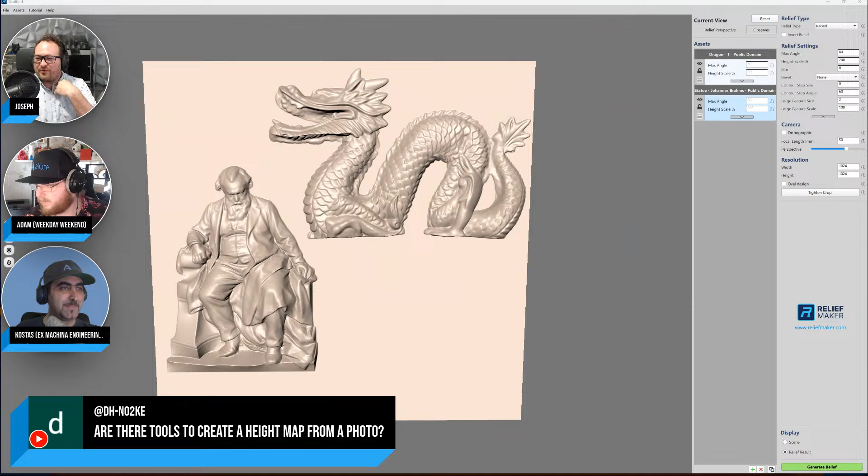Looks like we have Steve back, by the way. Oh, okay, did we lose Steve?

Yeah, that is an interesting video, actually. It's a very interesting video. In fact, if we go to the beginning here, there's some boats and whatnot, but I wonder how that Greek flag got there. I don't know. There you go.

Boats, sailing, Mediterranean Sea. There you go.

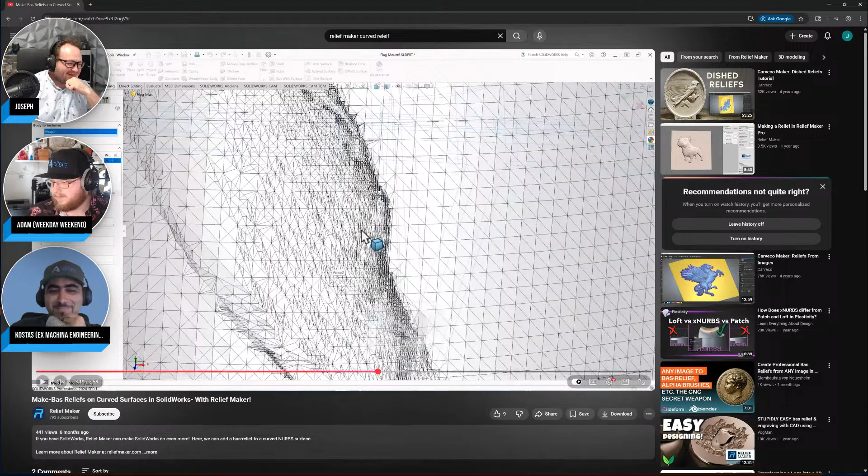So this was a height map that was exported out of Relief Maker, and Relief Maker has really good quality height map exports with multiple options. We stuck this on a UV in another CAD platform, like SolidWorks or something, I'm not sure. And then we were able to get what's called a curved bas relief on a curved surface. So depending on what software you're using, it's really handy and probably worth showing.

Okay, now you just gave me an idea for a YouTube video for Alibre. I can't wait to see it. When Kostas says he has an idea, we got to take that seriously. Yeah, because I think I know how to get to the same result from a UV map from Relief Maker with Alibre. It does go through Blender, but I think the result will be the same.

So let's see, can you guys hear me now? We can, yes. Hey! I think I better make sure you've got your voice, and then I'll give you the presenter status.

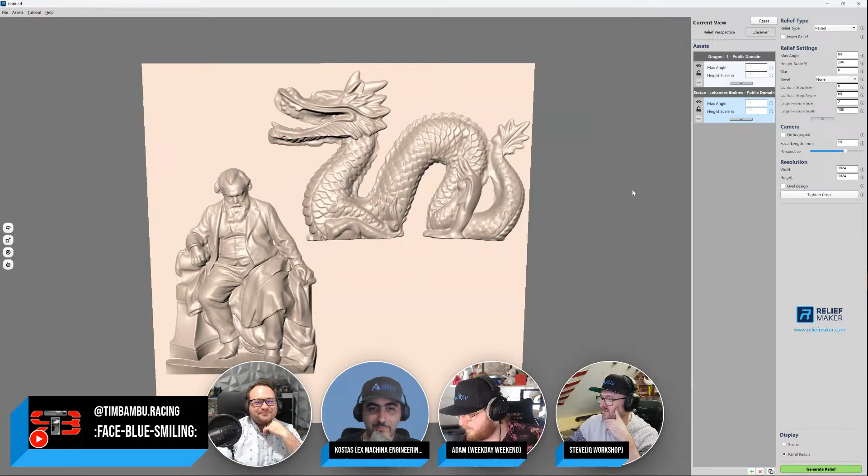Do you have any other questions about Relief Maker or Alibre? Where can people get Relief Maker? Yes, that's actually the golden question. Reliefmaker.com. Right there, and then try it free, pricing. It's very reasonably priced, actually, right?

Because I have a couple of clients that are in the woodworking business, right? I repaired the CNC router for one, and I made one for another one, right? And making large ornamental wood - what is it called - like ornamental sheets of wood. Yeah, that's veneers, right? So they make a veneer that they put on...

...a large wall or investment or whatever, and these things cost a lot of money, a whole lot of money. And it's really difficult because most of the time the customer comes and says, 'I wanted to show this and that,' right? It's definitely a lot easier getting a picture and using those tools we just mentioned that are not very reliable, but they will cut the making time of that height map by quite a bit. And then you just put it in there - you get your relief, export as an STL, import to CAM, and start cutting.

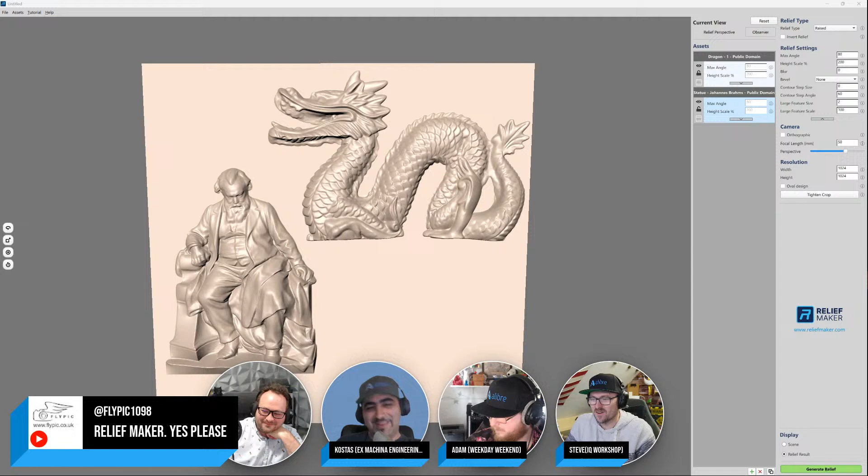Well, do we have any other questions? Is there anything you guys think Alibre cannot do so we can do it live on stream here? You're putting yourself on the spot right there. There you go, you either go big or go home, right? I think certainly in my experience, the limitation is on the operator, not necessarily the software. Yeah, but you know what, that's true for most parametric CAD systems, isn't it? Yeah, how you use the tools. Yeah, exactly.

Well guys, I'm not seeing anything new. I think we got to everything. So let us know in the comments.

It says it appears wrap can only be applied to cylinders. Actually, no. Joseph has an amazing video on how to get true 3D textures on surfaces in Alibre. It's almost magical to watch how he does it, and it does involve wrap and project and all that. No, it can be applied to other types of surfaces. The limitation, I think, is that it cannot be applied to more than one surface at the same time. Correct me if I'm wrong, guys, but that's the only limitation. If it's a continuous surface, it will be able to do it.

Interesting. Let's take a look at that.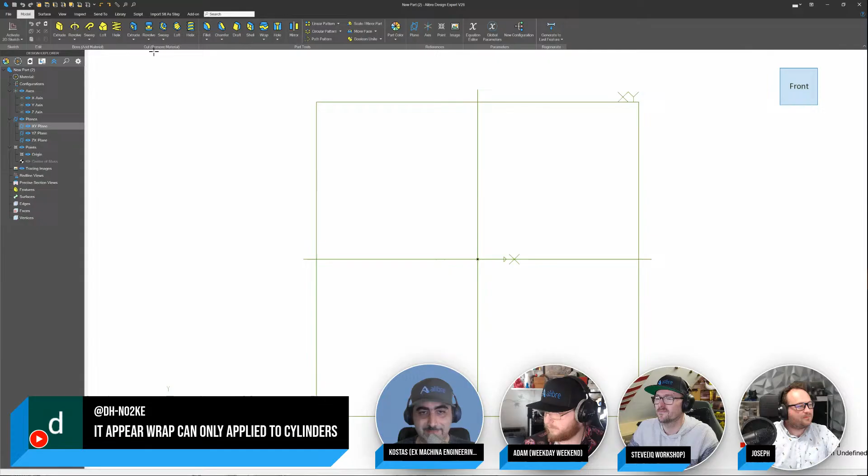All right, guys. Now Costas, I have to ask, I'm having a hard time remembering which video you're talking about. Oh yeah, again this is proof, people, that Joseph has forgotten more about Libre than what we collectively know. But there you go. Yeah, so it's on the official Alibre channel, right? And I think it's called 3D Textures or something.

Oh okay, I know what you're talking about. Yeah, that might be good to pull up. Two methods to make a 3D texture on a complex surface. Amazing video. Guys, that's like, it's not even a tutorial. That's just entertainment right there.

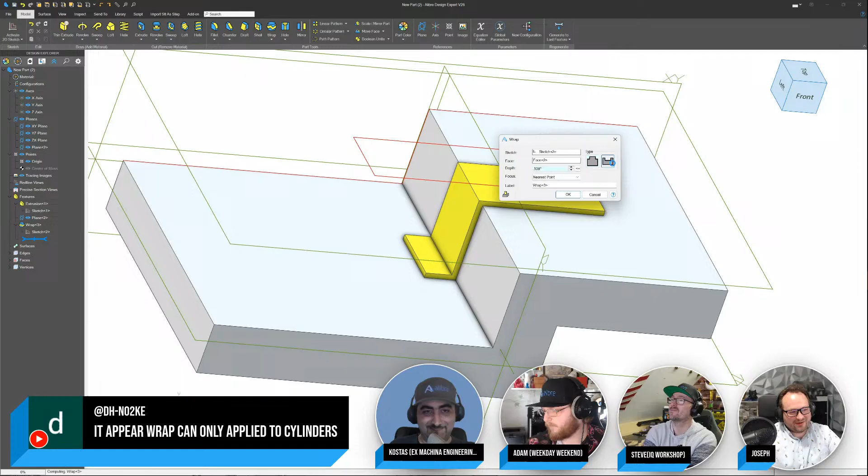So in some cases we can see a wrap can go across certain faces after you select one, and I think we can remove material as well. Oh, there you go, so let's play with it, because I've also had times when I've had trouble with it. It may be worth grabbing this sketch and going into project, and it looks like project works as well. Project is my favorite because it matches the sketch exactly. So I was wrong then. There you go, yeah, Alibre is even better than I thought it was.

Yes, so to avoid you guys watching me model stuff for half an hour, I will pull up YouTube here.

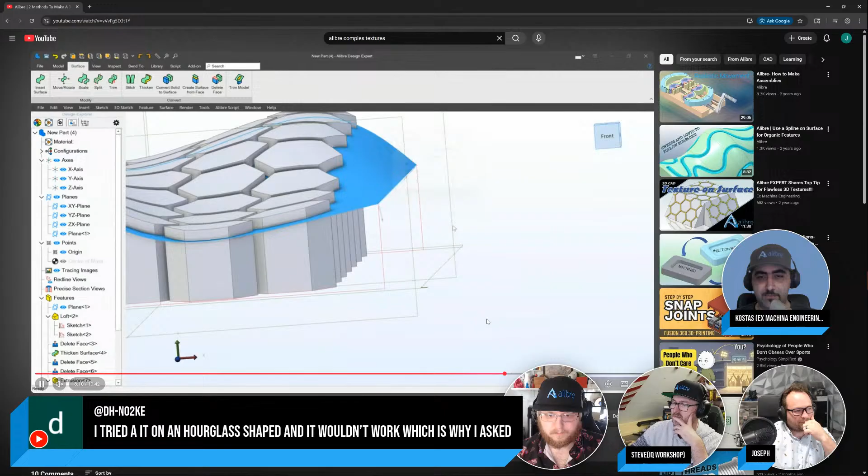So DH, the same guy that asked the question, says he tried it on an hourglass shape and it didn't work. I would look at the format more than anything else. Was it an imported STL? If it somehow was a single surface, could that throw it off? But you can see right here in this video there are some pretty interesting things going on, right? This is one of the best videos on the Alibre channel, for me at least.

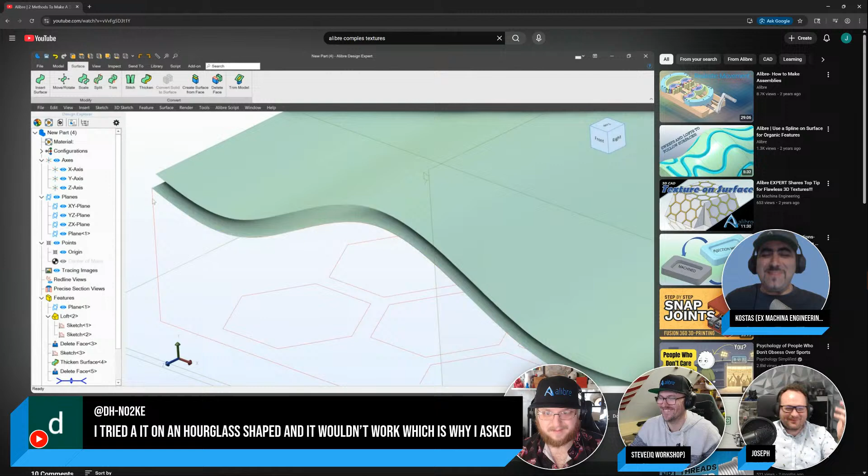Yeah, it looks like here I took a surfacing approach. So that's one, that's not like you, Joseph. I'm going to become a walking trope of surfacing here. You're the surface king, man. Surface king, and we all know that.

Well, thank you. In this case I think I extrude through it, and I use the surfaces to trim to get that thing. That was one method, but you showed another one there too, two methods. But yeah, that's a really good one, actually, just a simple extrude and then trim it with surfaces.

Yes, there you've used the wrap feature. Absolutely. So on this side they're all going in the same direction, so if you're injection molding or something like that, you want all those faces up and down. If you have more flexibility, I think I did a thickened surface over here, and as it thickens it gets normal to the surface.

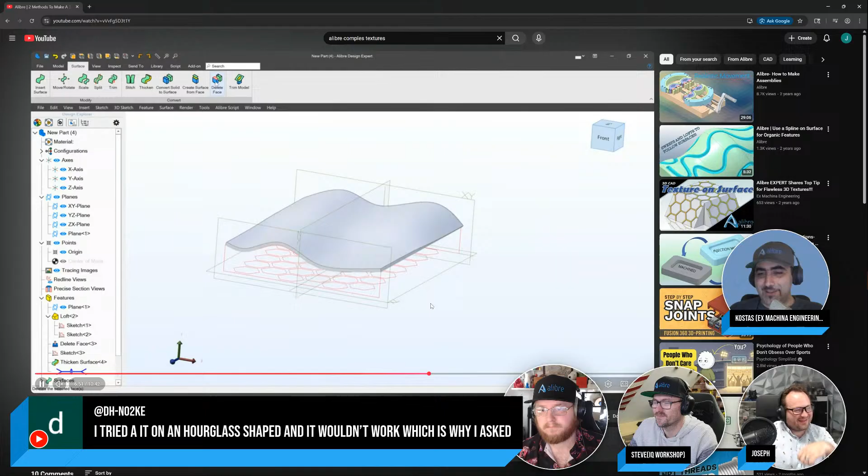So yeah, check this video out, I guess, and you can see all the little details of me sketching, which is probably really boring. It's not, it's you grab your coffee and you spend like 10 minutes watching magic, right? That's it, and you can see one of my videos over there in the corner as well.

I tried to do a texture. It's a really stupid way to get a texture going, but it works and it's reliable, it's just really stupid. So, well, I don't know, my version, I mean, right?

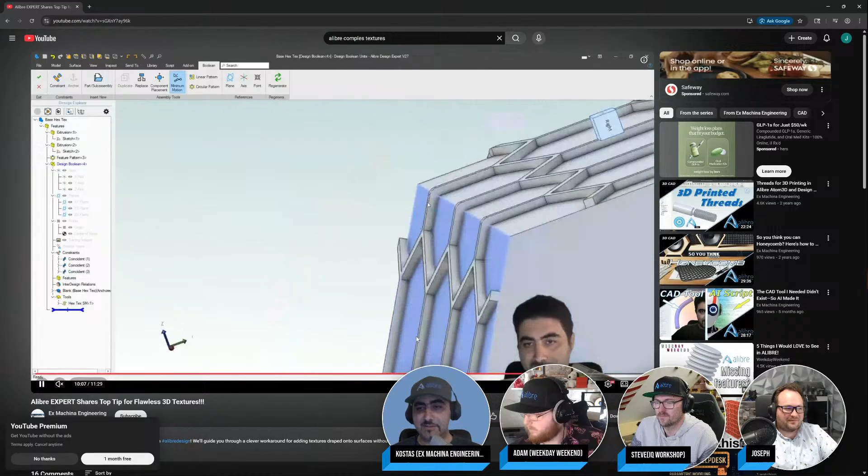But to get back to DH's question, if you tried it on an hourglass shape and it didn't work, it probably has to do with the actual geometry. Was it a surface? Did you import a surface and make it into a solid or something like that? Lofts sometimes don't play well with these tools. So you can definitely get an hourglass shape with a revolve, right?

There you go. He needs to cut his hair.

No, here's the thing with this video. You have a consistent hexagon pattern that is not distorted. So if you want to go distortion free, that is the method. And for that reason, I'm going to say it's not stupid.

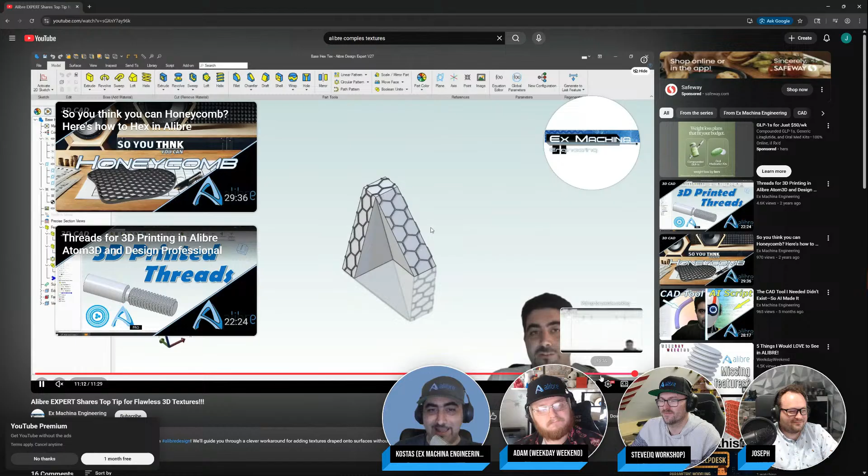What I do in that video is make a global parameters file and drive a solid 3D model, and with the same file drive a sheet metal model. The sheet metal model you can Boolean intersect with a hex pattern, giving you a hex sheet metal part. Then you do a second Boolean and unite it with your solid, and what you get is the pattern curving and following the 3D solid.

But the problem is you're constrained to the shapes you can make with sheet metal. You can have large curves and all that, but it's not a universal solution like Joseph's video. It is an out-of-the-box solution though, so it might get you out of a bind in some cases. That's pretty cool.

Yes, it kind of drapes it on the shape. The beauty of CAD is there's probably 10 different ways to solve the same problem, and you get to choose what's best for your needs. I've been doing a lot of textures, and especially if something wraps around 180 degrees, that method is the way to go, because you really can't do it with the surfacing method at all.

I've not seen any more questions in the chat. I think it might be it for this time.

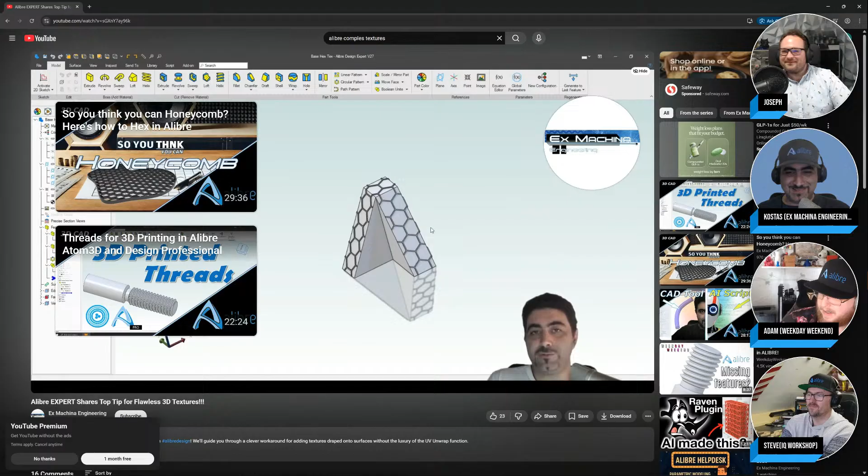So guys, you can actually design these models. What Adam has done on this website is you click on design it, or make it, and you get a 2D drawing and a timer. You make it in 3D and compete against other users who made it the quickest, which is amazing because you get to see where you stand against others. The problem is that the majority of users who made these models use Onshape, which is a disgrace. Most of them should be using Alibre. So let's get on there.

If you look at the Stats for Nerds page, you can see where we stand. Eventually I'm going to add a second place and third place and all that, but I need to go in and change the Python code for that. Little sneak peek here, guys.

If you want to tab over, we have a little sneak peek, and this is one that's going to go up pretty soon. The last couple of parts on the website were actually made by Joseph himself, so there's a couple parts official by Alibre. I'm thankful for that.